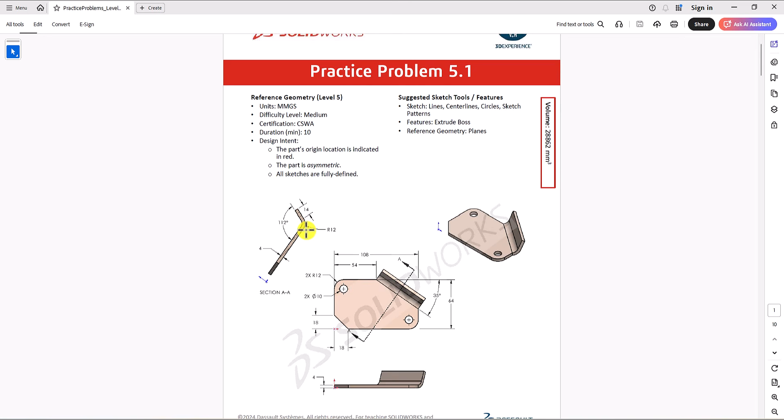My preference is to focus on the top view. First, I'm gonna make a 2D sketch of the top view, just this portion. Then I'm gonna make a plane parallel to this line, basically parallel to section AA, and make a 2D sketch of this part of the geometry, and extrude that. So with this introduction, let's jump into SolidWorks and start modeling this part.

In SolidWorks, first thing first, we need to check unit of measurement, and you can see that we have millimeter gram second, which is a correct unit of measurement. Now I want to focus on the top view, so let's click on the sketch, and choose top plane.

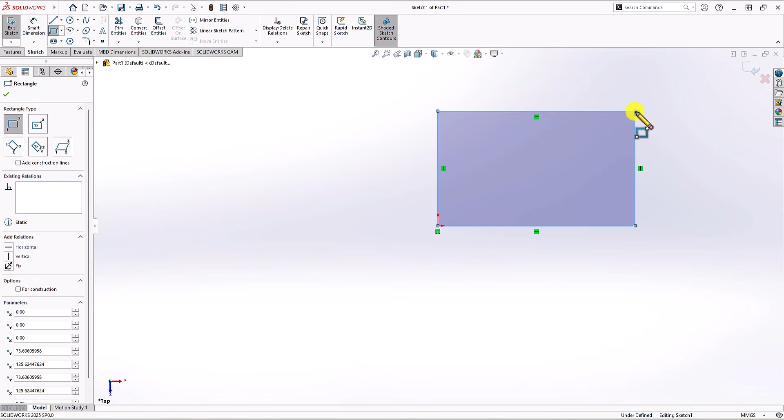So here, I'm gonna start with making a rectangle. Click on rectangle command, and then here I'm gonna make a rectangle. Now, looking at the top view, you can see that the width of this rectangle is 108 millimeter, and the height is 64 millimeters. So this should be 64.

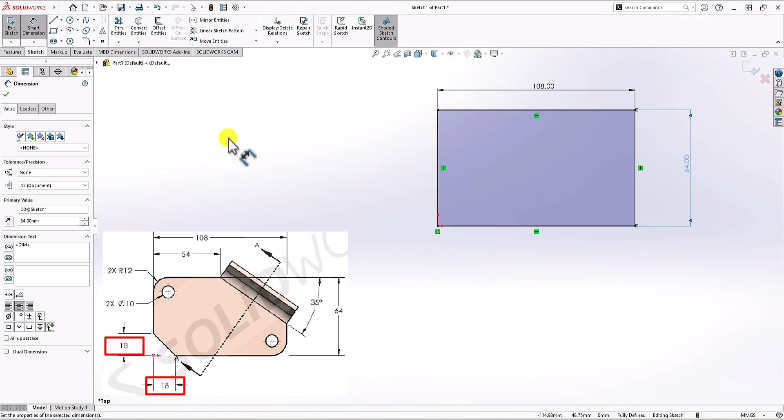Also, you can see that we have a chamfer in this corner. It's 18 by 18. So what I can do from a sketch, I can click on the drop-down menu for the fillet and choose sketch chamfer. And this one, I'm gonna change it to 18 and I select this corner.

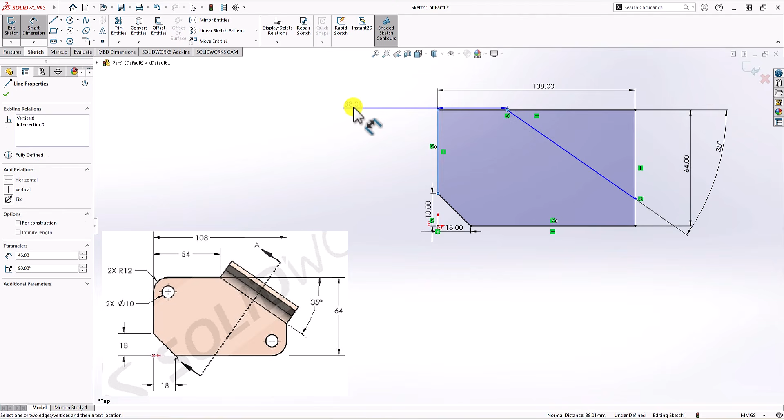Next, we need a line from here to here. So what I can do, I can click on line command and make a line from here to here. For the line, if you look at the top view, you can see that the angle is 35 degrees. So this angle should be 35. Also, the distance between this point and the left side of the geometry is 54 millimeters. So this is 54. And that's enough to define this line.

Awesome. So now all I need to do, I can click on trim entities and get rid of this line and this line. Of course, after removing those lines, now the geometry is not fully defined.

Let's see why this is not fully defined. I can click on one point and move it, and I can see that I can move it up and down. This means that the height of the geometry is not defined. We actually defined the height, but because I trimmed part of the geometry, that dimension is gone. All we need to do is add that dimension.

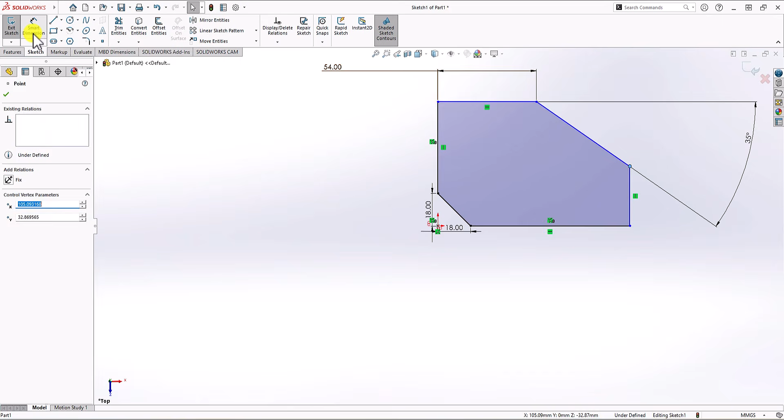Click on the smart dimension, and the height of the geometry should be 64. So this is 64, and same thing for the width. The width of the geometry is 108, so this should be 108. And now you can see that the geometry is fully defined again.

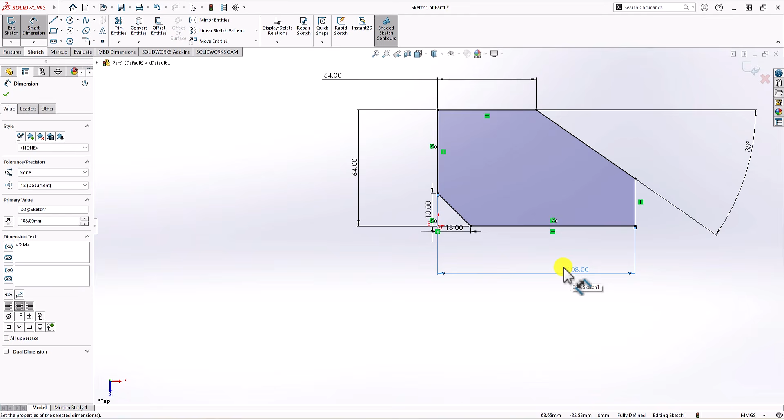Awesome. So now in the corners, we need fillet. The radius of the fillet is 12 millimeters. So I can click on fillet command. I change the radius to 12 and choose this corner and this corner. Click on OK. We also need two holes in the center point of the fillet.

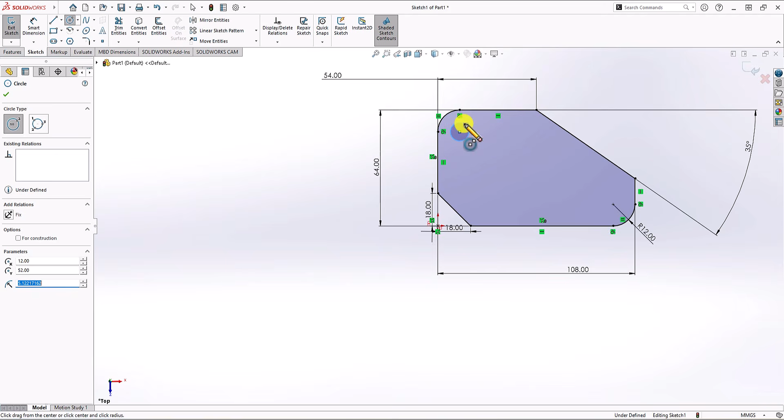So click on circle command. The diameter of the hole should be 10 millimeters. So I make one hole here and one here. And the dimension should be 10 millimeter. This one is also 10 millimeter.

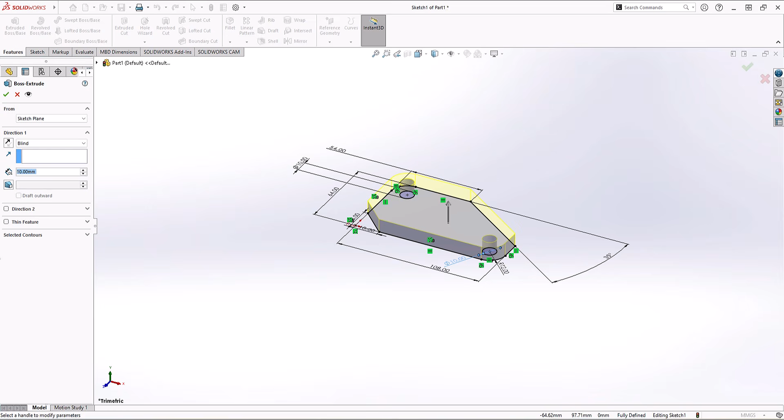Awesome. So now we have the ballpark of the geometry from top view. Let's click on feature, click on extrude boss, and then here, if you look at section AA, you can see that the thickness of the part is 4 millimeters. So I change the thickness to 4, and that's it. Awesome, so this is the first part of the geometry.

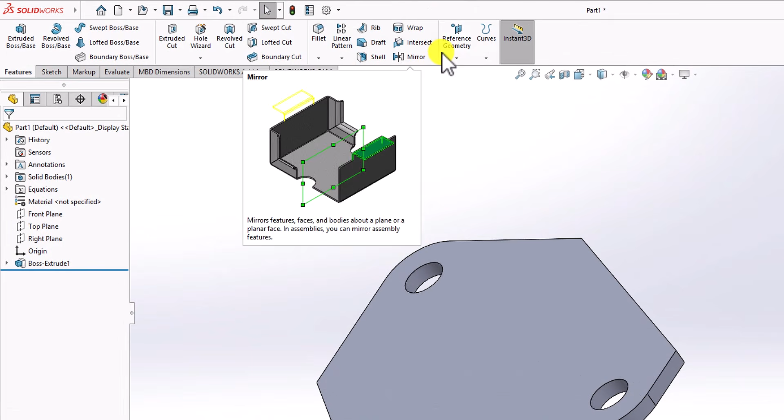Now we need to focus on the second part, which is the bend part here. In order to make that sketch, all I need is a plane. So let's click on feature, and then from the options here, click on reference geometry. And here you can see that we have different options. I click on plane command. This command helps me with adding a plane, okay? So all I need here is a plane perpendicular to this line.

It also needs to pass through this point, this line basically. So for the first reference, I'm going to select this line. And now you can see this is the plane I have.

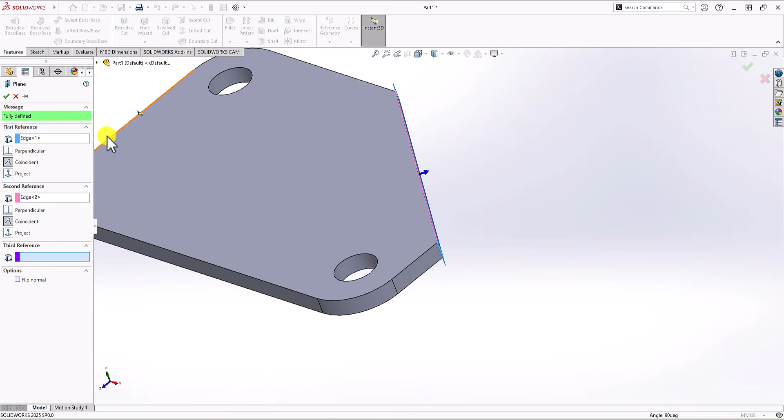This is not good for me. I want this to be perpendicular to this line. So for the second reference, I select this line. Now you can see SolidWorks automatically changed the plane, but it's not perpendicular, it's actually parallel to that line. So all I need to do for the second reference is change the relationship to perpendicular. Change it, and now you can see this is the plane I want to have.

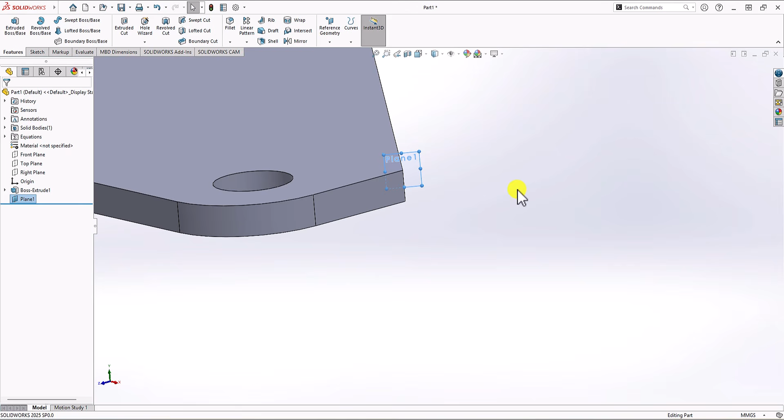Click on OK, and that's it. That's the plane. Now all I need to do is draw a 2D sketch on this plane and then extrude it. So let's click on sketch, and this plane is now selected. So what do we have here? We have one line, something like this.

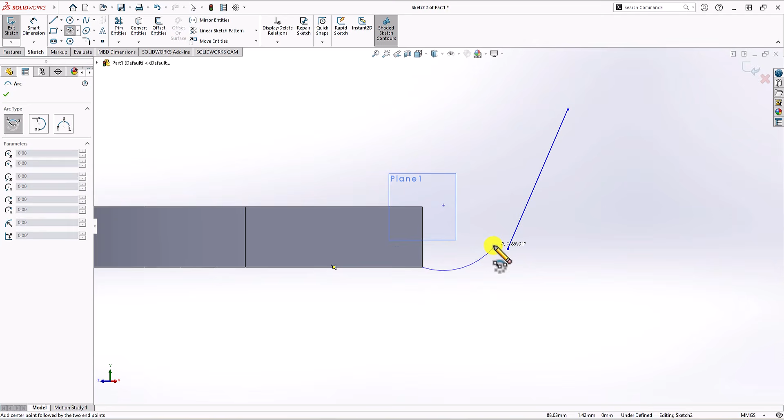And we also need an arc shape, something like this. First, the length of the line is 14 millimeters. So click on smart dimension and this should be 14.

We know that this line and the arc should be coincident, so I select coincident. Also, the arc that I have should be tangent on both ends. So I select the arc, hold Control, select this bottom line, and from the relations I choose tangent. I repeat this again. I select the line, select this line, and from the options I choose tangent.

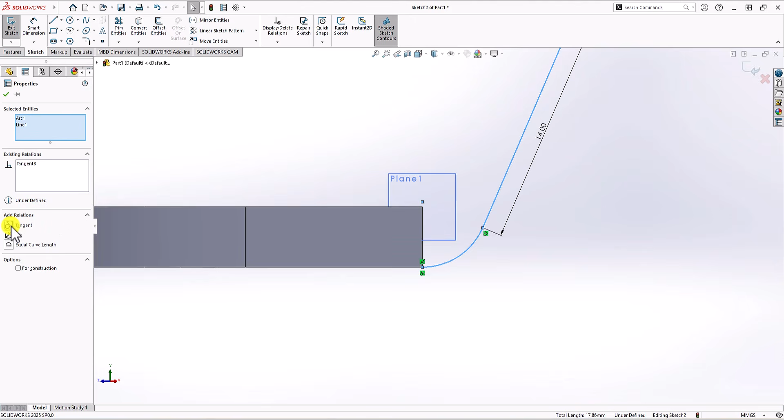Also, the radius of this arc is 12 millimeters according to section AA. So I click on smart dimension and this radius is 12. Now you can see the arc is fully defined.

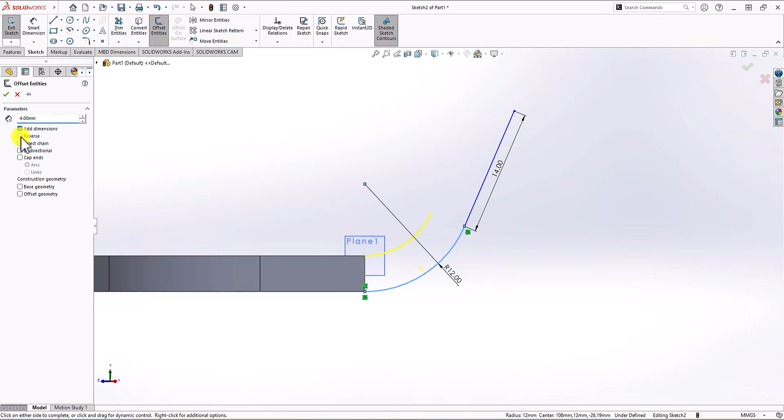Next, we know that we have a consistent wall thickness which is 4 millimeters. So here I can simply click on the offset command. I change it to 4 millimeters because I need a 4 millimeter offset, and I simply select this arc. I don't need a chain, so let's uncheck select chain, and let's check reverse because I want it to be on the other side. So that's the offset arc.

Click on OK, and finally I'm going to have one line here and something like this. Of course, the end point, this line and this line should be perpendicular. So from the options on the left side, I choose perpendicular, right?

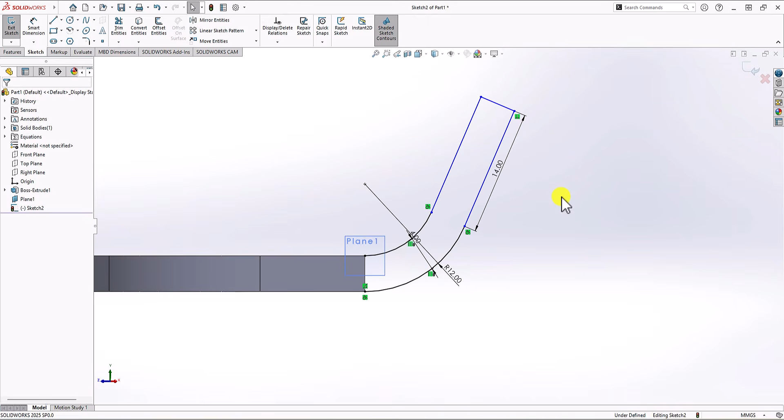Also, according to the question, the angle between this line and this top surface should be 112 degrees. So I select it and change it to 112. Now you can see that I have a fully defined geometry.

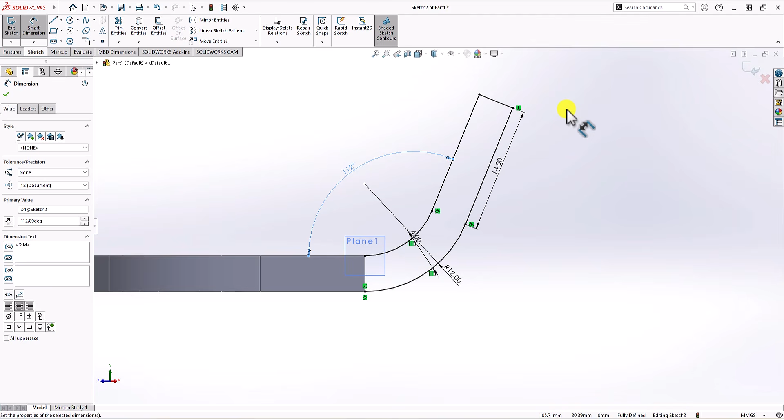Now all I need to do is close this contour. Click on the line command, and from this point to this point I just make a line, and now I have this.

Now all I need to do is extrude this geometry. To do this, click on feature, click on extrude boss. This geometry is selected, this contour. Let's change the direction, and from the drop-down menu I'm going to choose up to vertex.

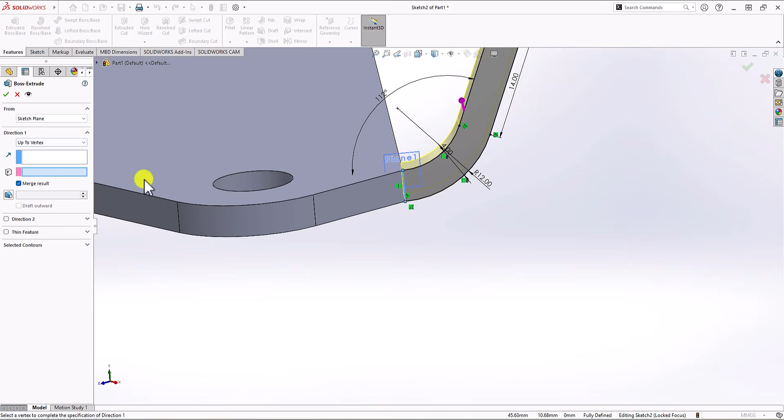This means that I have to define the endpoint. And for this extrusion, I'm going to choose this line. Now you can see the extrusion is happening. It starts from this point and it's going to end here. Click on OK, and that's it.

Awesome, so that's the final geometry. That's all we need for this question. Now, just to make sure this is the correct model, let's go back to the question and check the final answer.

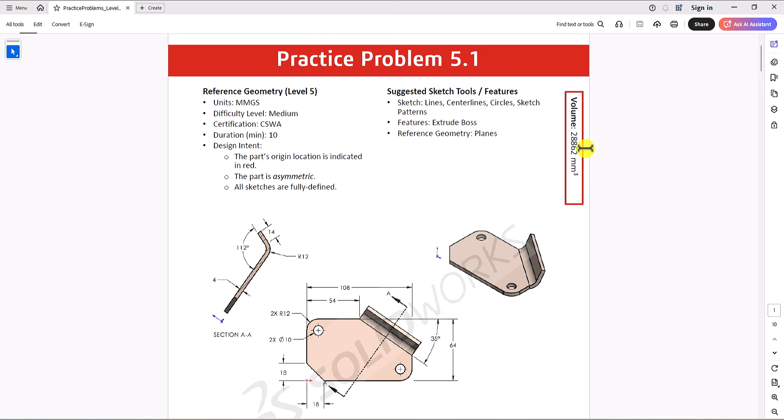In the question, you can see the total volume. The total volume is 28,862 cubic millimeters. Let's go back to our model and check the total volume for our model.

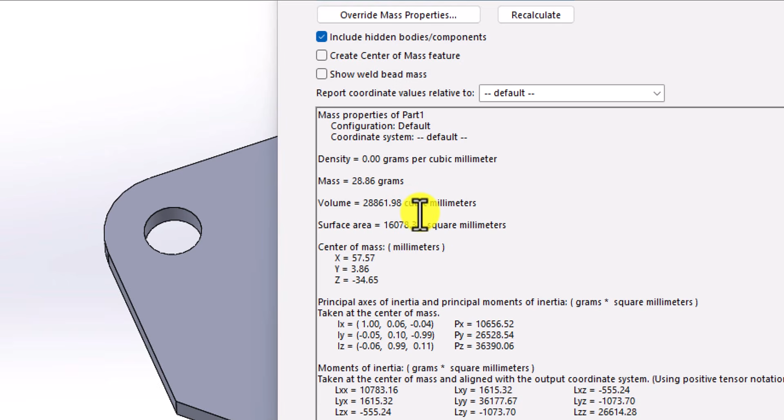In SolidWorks, in order to check the total volume, you can click on Evaluate and then Mass Properties. Here you can see the final answer. The total volume that we found is 28,861 cubic millimeters. If you round up this number, you're going to get exactly the same answer as shown in the question. This is telling me that my model is correct and there's no problem with it.